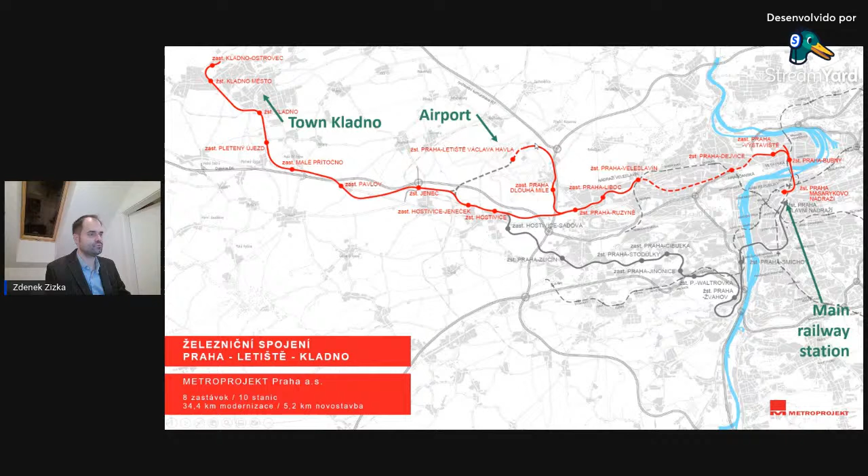About the entire project, this presentation is called the selection of the route for the railway tunnel in the center of Prague. This tunnel is part of a larger urban railway network connecting the center of Prague with the airport and the nearby town of Kladno, which is basically a suburb of Prague, because a lot of people travel every day from this city to work in Prague. A new railway connection will be established, with a stop also at the airport. Here are some impressions of the project before I get to the tunneling details.

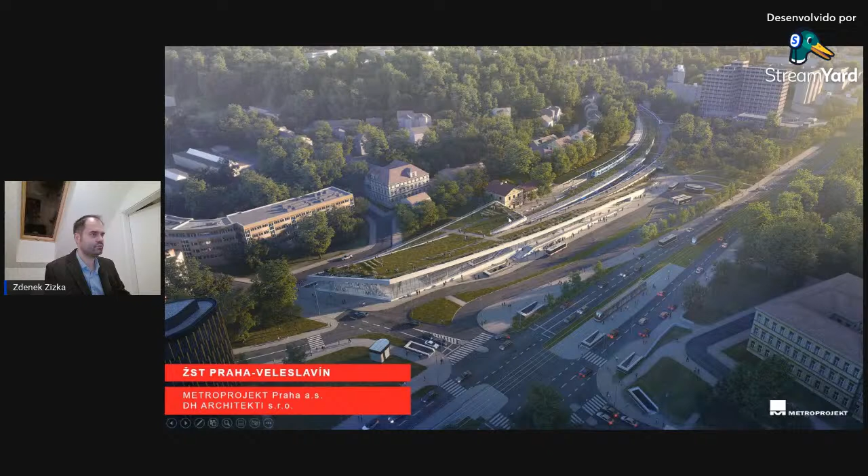One railway station in Prague as part of this project. Another station here, partially underground, partially above ground. Here's the same station from inside, and here some impressions of the upgrade of the railway station in Kladno. The last station will be at the airport in Prague.

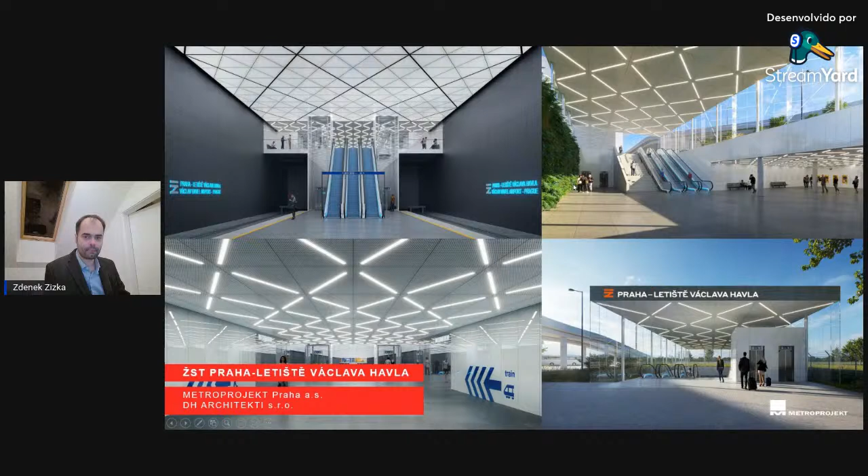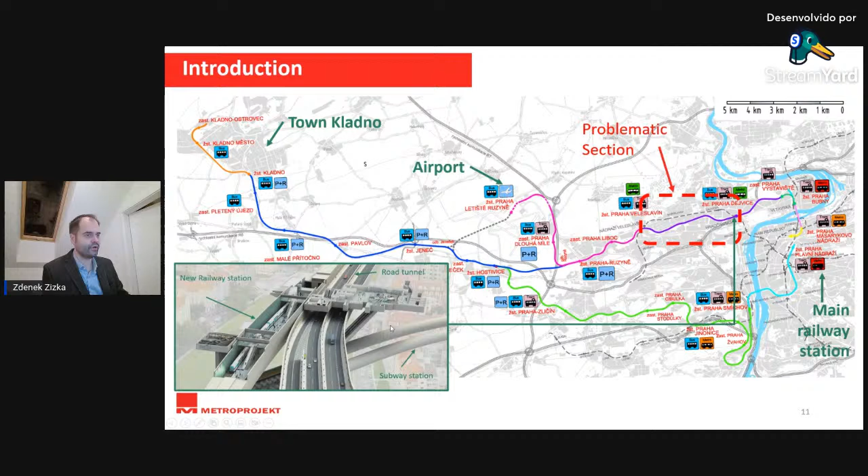So I'm getting back to the tunneling stuff. Here I will focus on this problematic section, which is supposed to be entirely in tunnel, and there are some interesting interfaces. For instance, at the start of this section, you have an interface between this new rail tunnel, which is the subject of this presentation, which has to be constructed just next to the existing road tunnel, and under it there is a located subway station. So it's a very dense area, and everything has to be interconnected. So I'm coming now to the development of the route variants.

Before talking about it, I want to provide some excursus into the design stages in Czech Republic. How is it defined by the construction law?

First, you have to do the feasibility study, including technical economic assessment, and then you go for the preliminary design stage. When you submit this preliminary design to the authorities, you ask for the issuing of the so-called zoning decision. At this stage, only one variant of the project is possible.

After that comes detailed design, and this is then followed, if successful, by the issuance of the building permit. After that, tender design is provided, and this is the basis for awarding the construction work, because as is typical in Czech Republic, the contract type is design-bid-build. There are some design and build contracts, but I think there is just one.

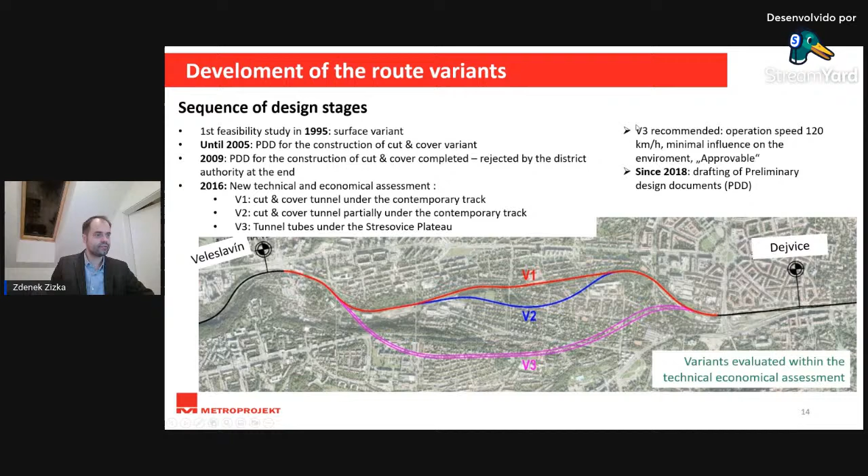So this variant was preferred, and since 2018 there has been drafting of preliminary design documents. During 2019 we designed this variant.

We had a negative statement from the Institute of Physics because they were afraid that if the tunnel is constructed and especially operated under the Institute, it will destroy the possibility of the institute to conduct precise physical experiments due to vibrations and background noise caused by the tunnel.

So there was a slightly different variant, the so-called North New, which was shifted a little bit towards the north. But there was another problem: in this area, at the start, you go very close to private properties, and this was considered quite a high risk for this tunnel variant.

So it was decided to find a new variant, the so-called South, which uses the Střešovice plateau as much as possible and tries to get as much cover as possible.

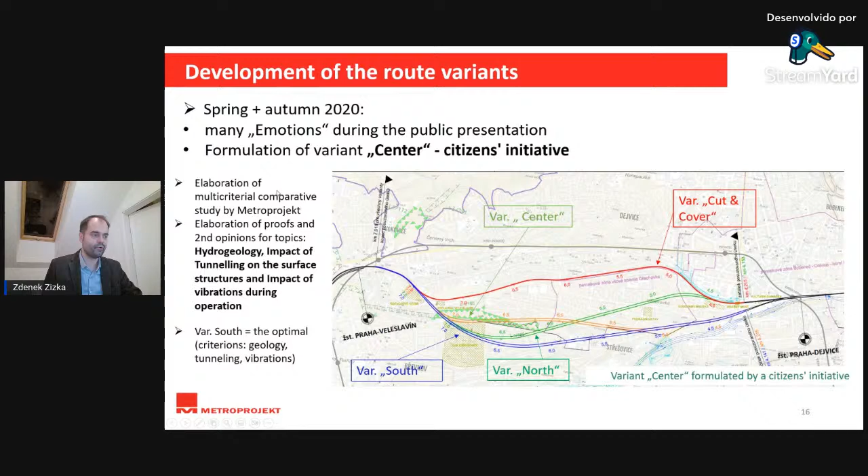It turned out, as we expected and as our multi-criteria evaluation delivered, that variant South is the best in all aspects. So we followed this variant.

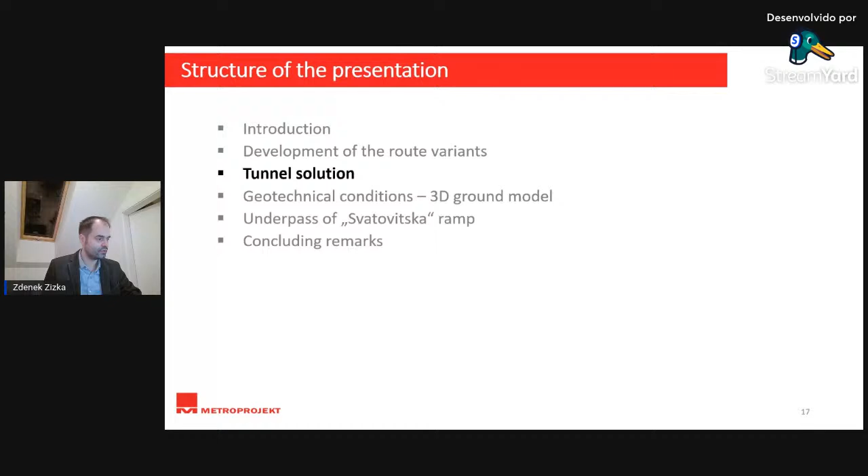Now I'm going to say something about the tunnel in detail. It is planned to be 2 single-track tubes excavated by TBM under a populated area. On the right side you can see the longitudinal section of the track. Now I will show you a video.

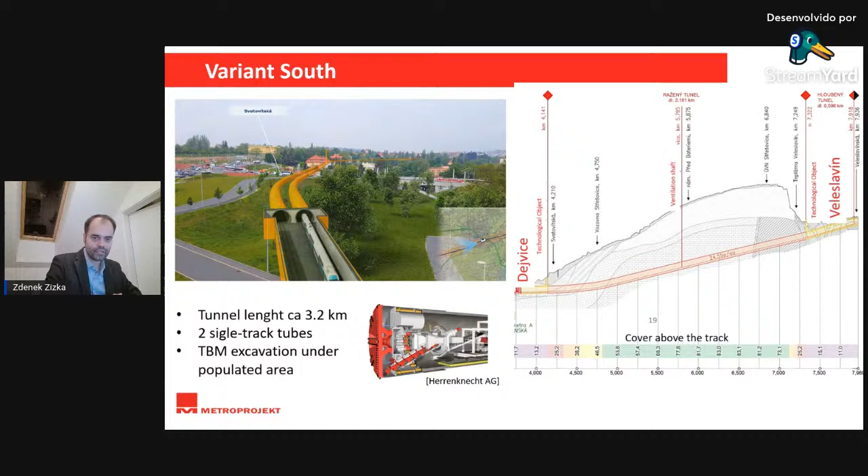I hope it's working, showing how the tunnel will pass under the Střešovice plateau. At the start the cover is about 30 meters and increases very fast. When it arrives at some populated area, the cover above the tunnel is at least 45 meters. When it passes under the church, it has 60 meters of quite competent rock above.

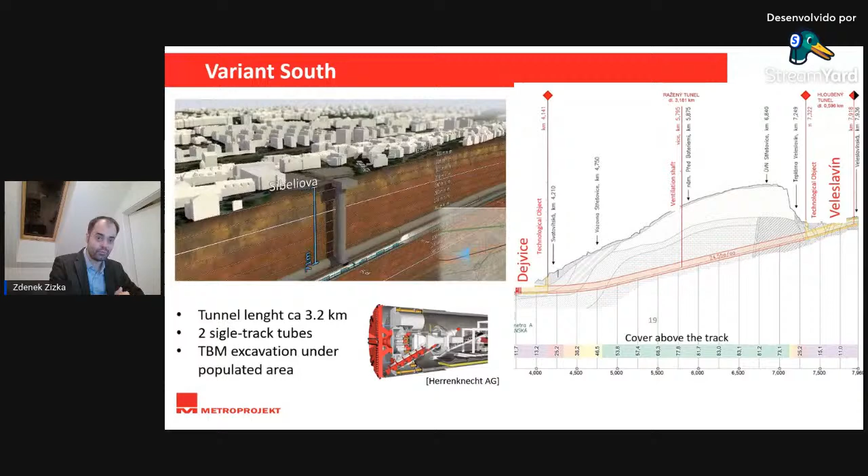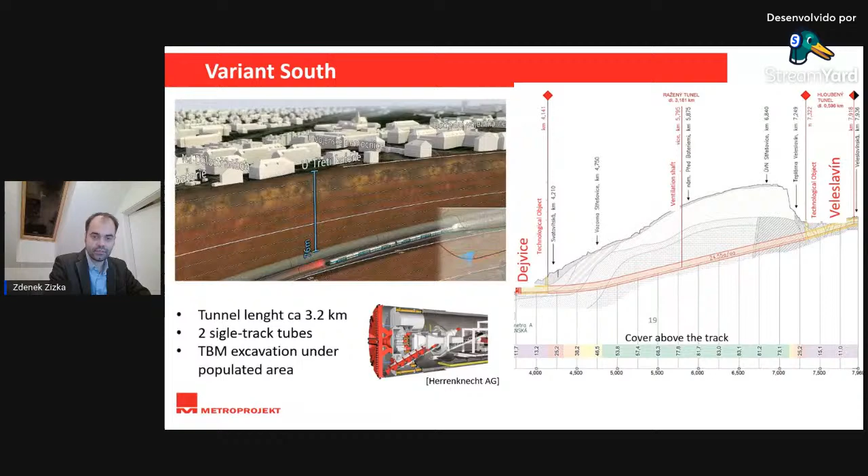At the end of the tunnel, the cover is about 70 meters, and now we are at the deepest point under the Střešovice plateau. At the end of the stretch, the cover decreases again, and we arrive at the tunnel portal, which is then followed by another cut and cover tunnel.

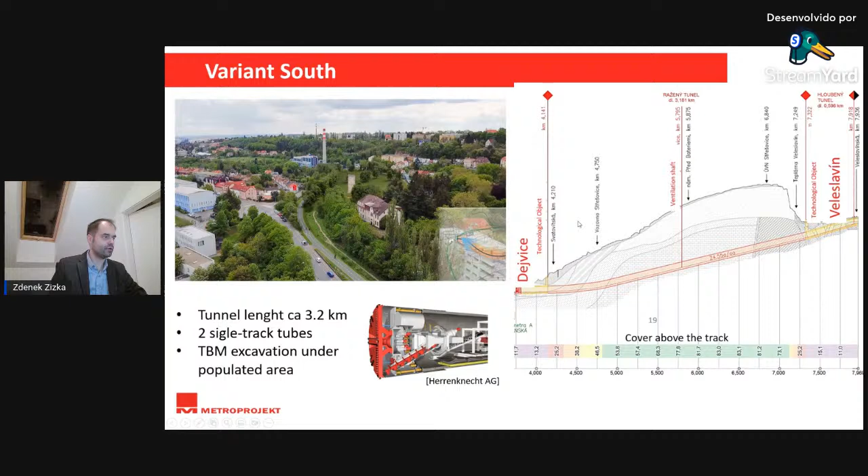So here's the alignment of the tunnel. Some interesting features along the alignment. The first complicated section is that you have to underpass with these TBM tunnels the so-called access ramp to a road tunnel, which is located here, in cut and cover.

Then you have to pass around tunnel Blanka, which is a road tunnel here. On this place you can see the failure of the tunnel, which happened during the construction of this road tunnel. So this is what we all would like to avoid.

Then we are passing close to the Institute for Physics, but the distance is more than 100 meters, so that should be fine for the physicists. We are passing under the church, here we've covered 60 meters, so that should also be fine for the church by limiting the surface deformation on the axis, under the allowable limits.

Due to the fact that at the starting tunnel portal of this TBM tunnel there is a cut and cover station, and on the other end there is also part of cut and cover stations, we have to have in this tunnel a ventilation shaft for emergency purposes. This tunnel is 3 kilometers long, so usually it wouldn't be a problem for safety, but in this case we needed to introduce it.

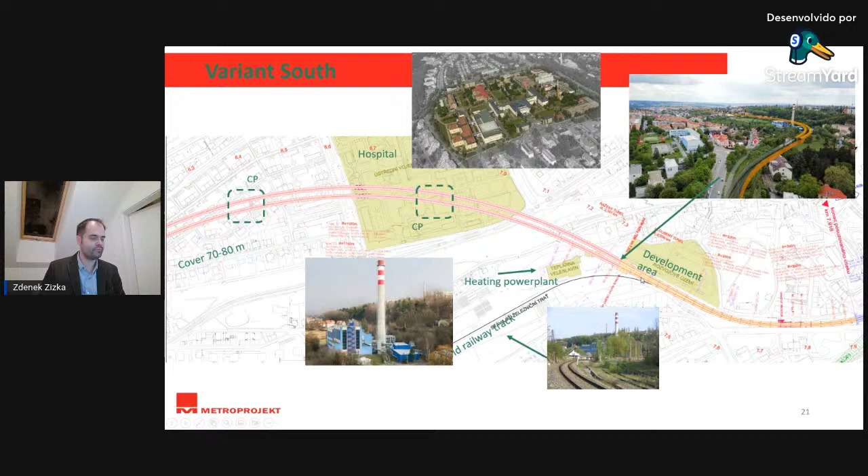So here is the second part of the alignment. Here it's necessary to pass under the hospital, but the cover here is above more than 70 meters. And then at the end, when you're arriving at the portal area, you pass around the heating power plant.

So something about the tunnel cross section. There will be excavation diameter expected 9.9 meters, internal diameter 8.7 meters, segment lining thickness 45 centimeters with EPDM gaskets. And in this current stage of the design it's not decided whether it's going to be reinforced concrete or steel fiber concrete. This is going to be defined in the next design stages.

What is interesting, we have a railway tolerance, which is necessary according to the Czech norms for railways, which is 30 centimeters. And what is possible is to include in this 30 centimeters also the driving tolerance for the TBM, which is saving some centimeters of the cross section.

And what is also interesting, or good to mention, is that there is going to be slab track in the tunnel.

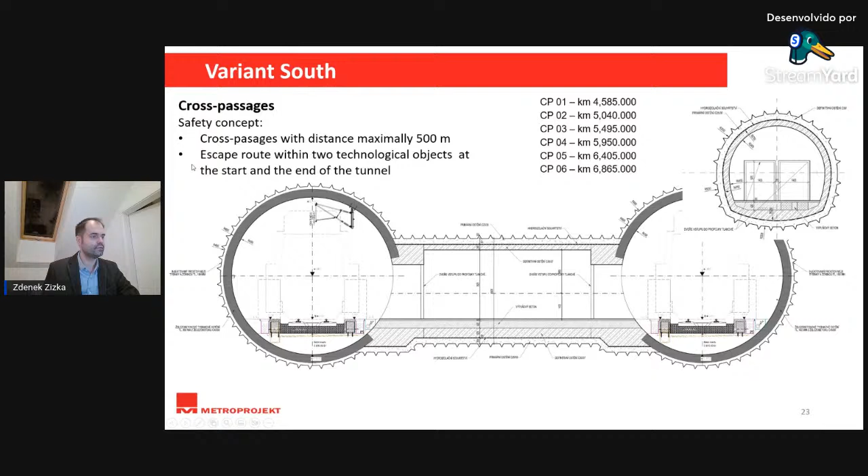So here are the cross passages every 500 meters, based on the European law, nothing special. And there will be not only the cross passages, but at the start and at the end of the tunnel there are 2 technological objects, and they can be used also as escape routes.

Here's again the ventilation shaft. It's going to be about 60 meters deep, with the internal diameter about 8 meters, and it's going to be used only for emergency ventilation. It's not going to be possible to use as an escape route. For escape, there should be used only the cross passages or the escape routes at the portals of the tunnel.

This is designed with steel fibers for the primary lining, and maybe for the secondary, but the owner has still to decide if it's going to be allowed also for the secondary lining or not. For structural design purposes, at this early stage, we considered the lining as unreinforced, not considering any benefit of the steel fibers yet.

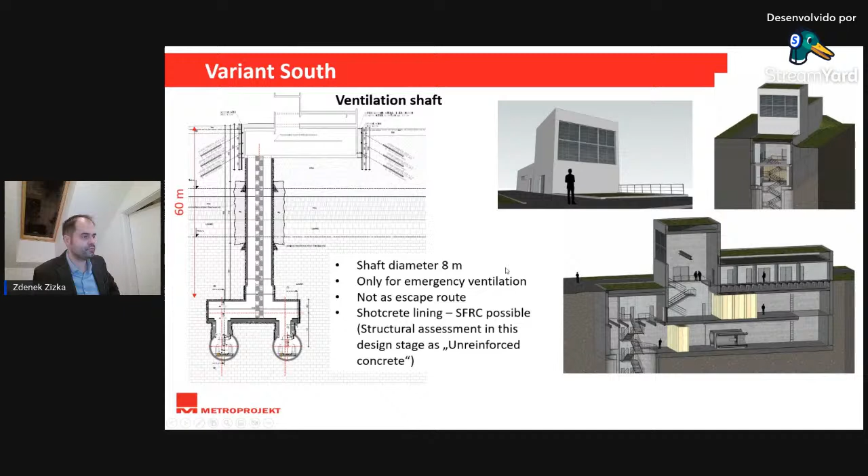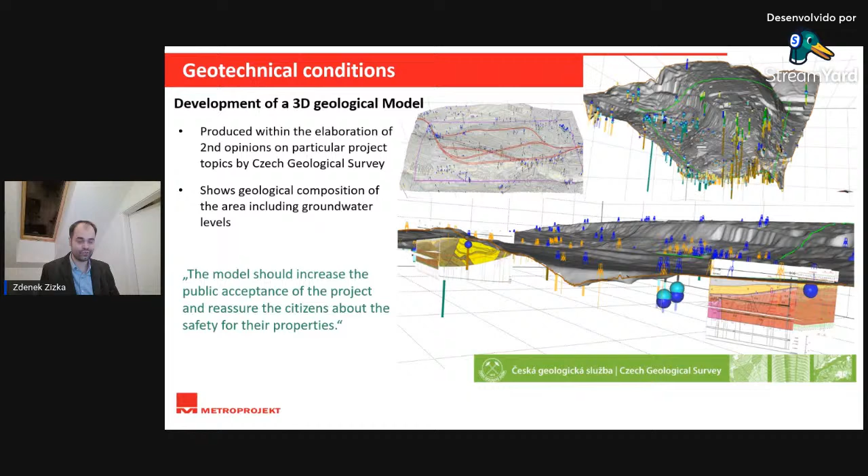Here is shown the 3D geological model which we have prepared for this project. As we thought, the intention of this 3D model at this very early stage of design is that the model should increase public acceptance of the project and reassure citizens about the safety of their properties. So the point was to show the public that we are sure what we should expect underground, or at least as sure as possible, and that we know what we are doing.

Here are some details about the model. It's based on the Czech coordinate system, which is quite specific, and it combines all new and old bore log data. What's important is that this model can be developed further in later design stages of the project.

So we started with this quite simple model, although there was a lot of bore data included, and you can extend this model in every next stage.

From this 3D model, you can extract 2D cross sections directly, and the model also enables automatic calculation of excavation volumes in various types of rocks. This model can be seen on the website, so if you're interested, check it out, and you can go through the area in 3D and see the expected rock conditions.

I'd also like to mention that this model was established in cooperation with the Czech Geological Survey, which put all the information together and established the model.

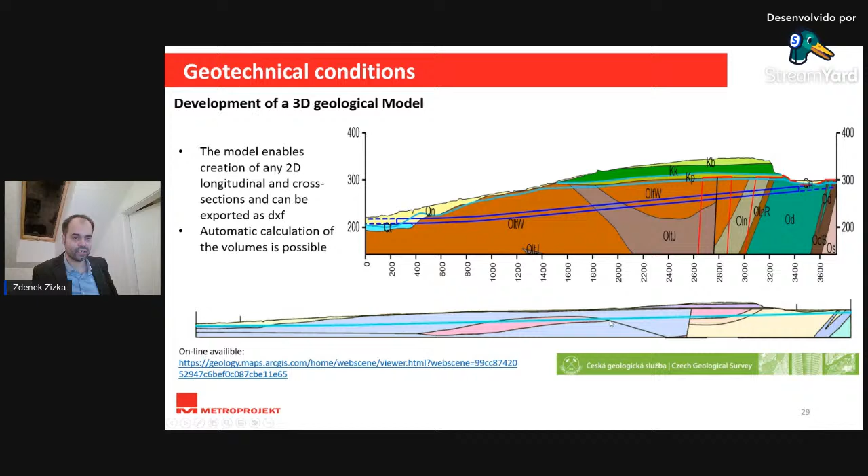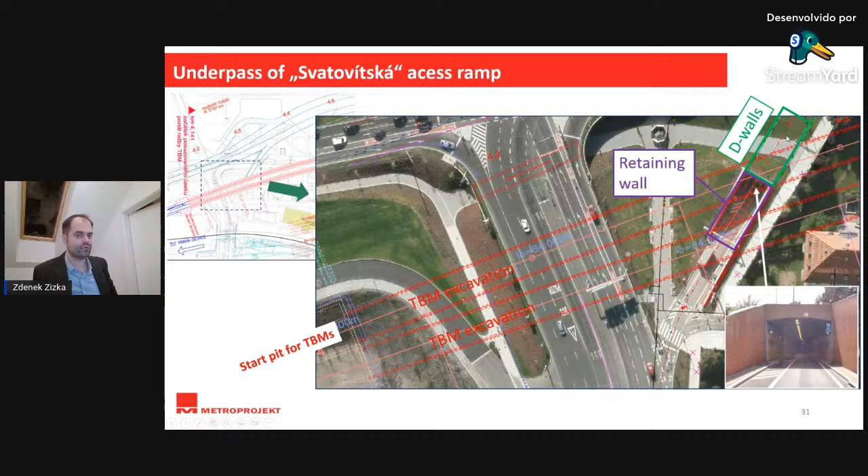So here is the cross section in this area. Here you can see the lamellas of the D-walls, and here is the retaining wall. The alignment of the TBM tunnels is planned so that we come up to within 2.1 meters of the bottoms of the lamellas.

What is the problem with these diaphragm walls? At the top of the lamellas there is a concrete slab, and this slab is loaded by the soil cover, which results in high point loads under the tips of the D-walls.

So in case we would drive here with TBMs using active face support, there will definitely be deformation of these structures.

Here's the cross section of this D-wall tunnel. As I said, here's the top slab, the D-walls, and the bottom slab.

Here is the cross section of the retaining wall, which is quite simple—just the angular retaining wall on both sides, nothing special, with road construction inside.

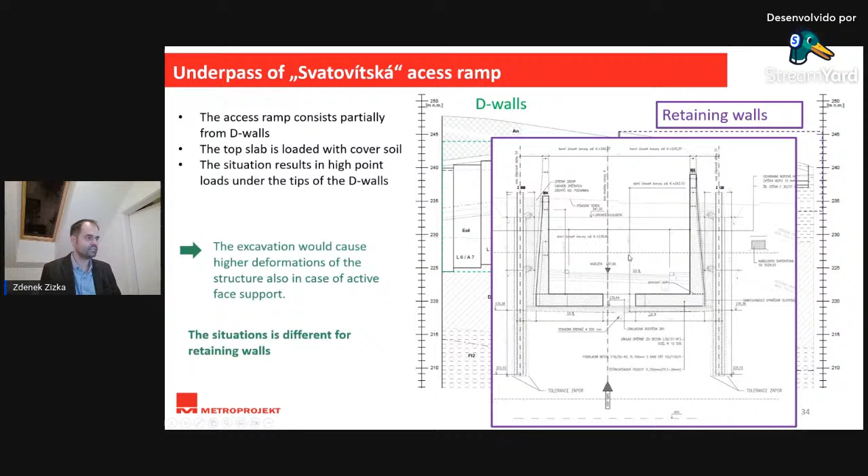So within the cross section, you have two different situations for both tunnels, here and here.

Going back to the layout, we decided to sink a shaft here before the crossing of the ramp, and make so-called pipe roofing for the left tube, and horizontal micropiles for the right tube.

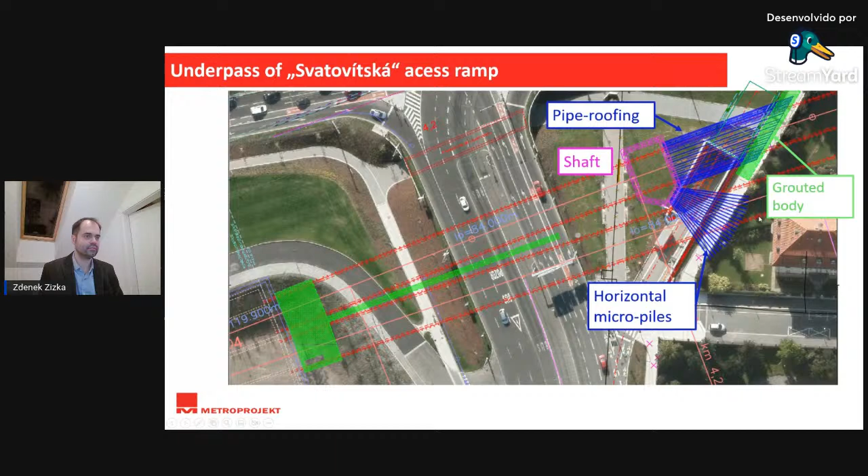So here it is in the cross sections. On the left tube, you can see the pipe roofing made of steel tubes with a diameter of approximately 1.3 meters. And here on the other side, you can see the horizontal micropiles.

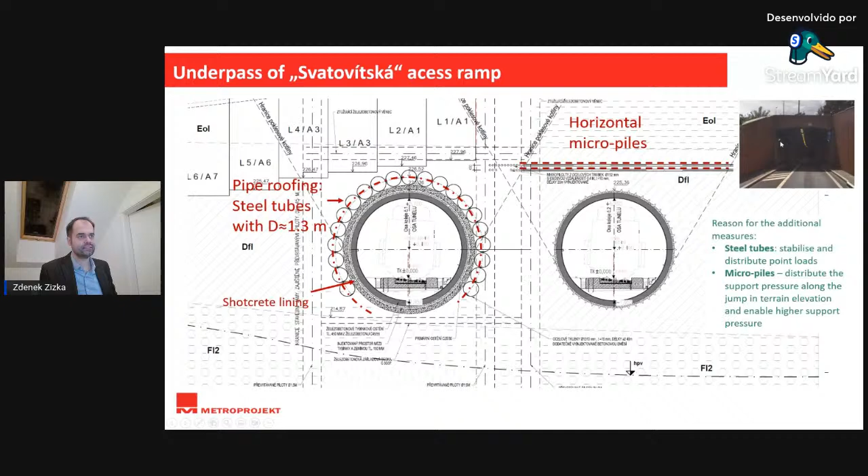There are different reasons for using these two additional measures. The steel tubes on the left side are used to stabilize and distribute point loads from the D-walls, and the micropiles on the right side are used to distribute the support pressure along the jump in the terrain and enable higher support pressure when the TBM passes under the retaining walls on the right side.

So here's a summary of the sequence of measures: excavation of the construction shaft, execution of the grout body, installation of micropiles and steel tubes. Then there will be shotcrete excavation under the steel tubes, which is subsequently filled with poor concrete. The TBM will pass on the left within the open mode inside this concrete body, and on the right side, the TBM will pass in closed mode.

But the question is how the pipe roofing could be installed in these very dense conditions, where you have a pit only on one side, and on the other side it's not possible to place any construction pit. Other boundary conditions include tight tolerances, the presence of soft ground where hard rock is also possible, and possible concrete rests under the D-wall tips.

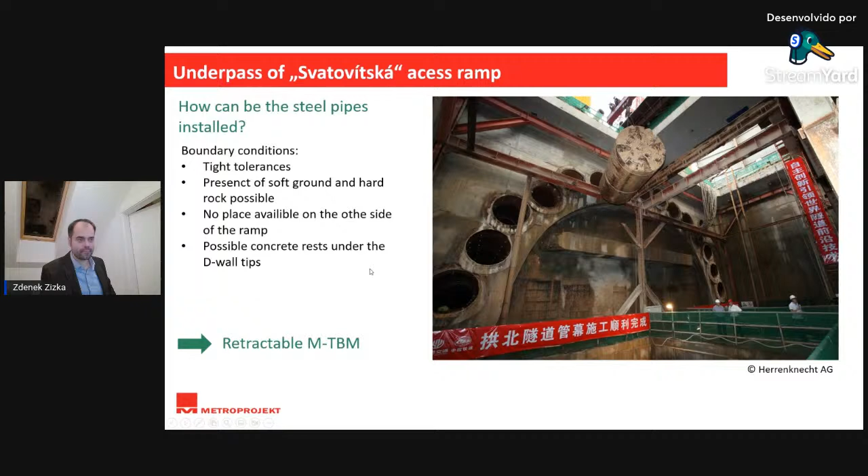What is the retractable M-TBM? It's a micro TBM which, after boring, can be pulled back again to the launching pit. There are two principles: one is that the outer ring of the cutting wheel is left in the ground with the shield, and the other is that the cutting wheel decreases in diameter and is then put back.

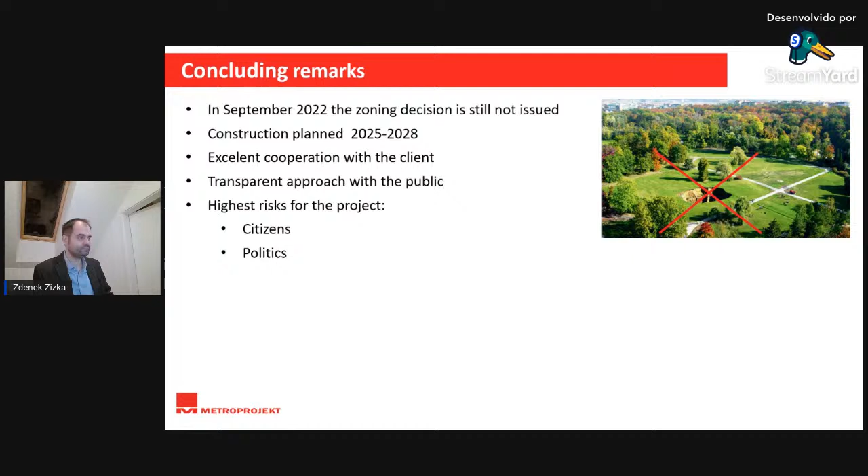Concluding remarks of my first presentation: in September 2022, the zoning decision is still not issued. Construction is planned for 2025 till 2028. There is very good cooperation with the client. We try to be as transparent as possible with the public, to talk about the risks and the benefits of the project, and we emphasize that we are doing everything to decrease the risks for the public as much as possible. But there is also the risk that politics will decide to stop the project, or that citizens will be so much against it that it won't happen that we go from the airport to the city center by train. So that was the first presentation.

I'm not sure, Daniela, if we should wait for some questions now, or should I continue with the next presentation?

I guess you can continue with the next one, and then we'll all check.

Right. Unless somebody wants to, if somebody has any question now, please send it in the chat. So far we haven't had any questions, so I would say just continue.

So here's my second presentation. It's going to deal with the new metro line in Prague, which is now already partially constructed. Another tender for construction is running now, and the third part of this new line is still under design.

This presentation is divided into three parts. First, there will be some basic overview. In the second part, it will focus on mined stations on this line, and part three will focus on TBM excavations.

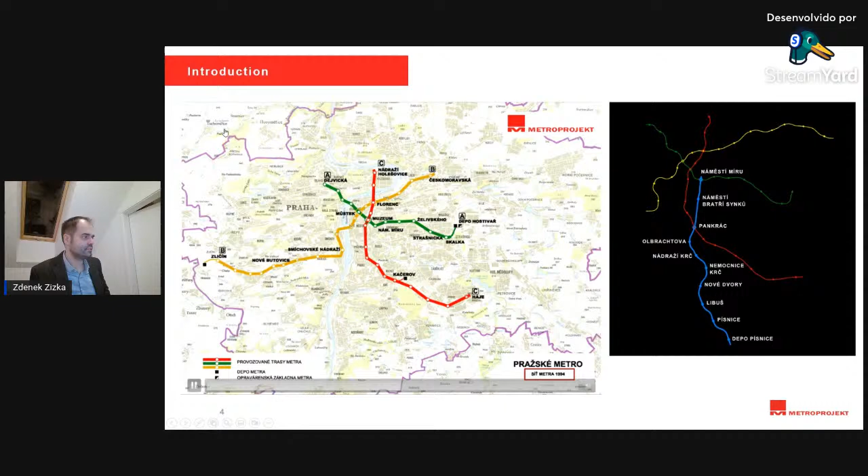So the basic overview: here on the left you can see the development of the network in Prague, with the years showing how it progressed. First it started with line C, then it continued with line A, and the third one was line B. Here you can see year by year how the network was increasing.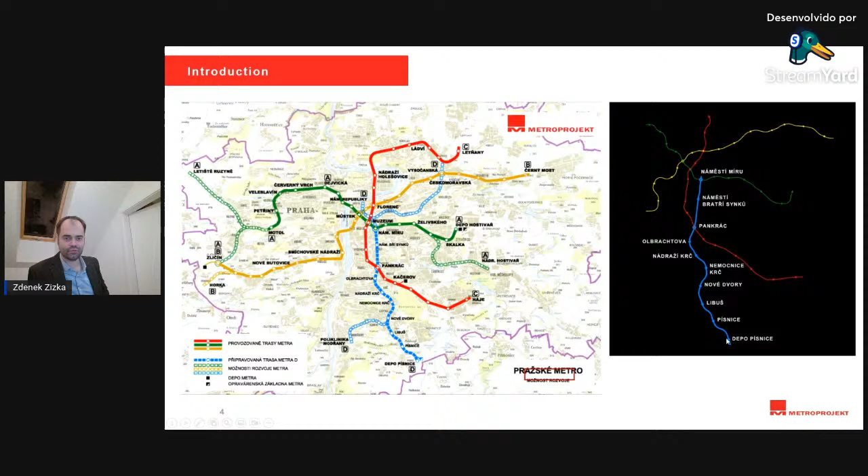So here we are now at this stage, talking about this line, the blue line, called line D, which is going to start at Náměstí Míru station in the city center and end in the south of the city at the so-called Depot Písnice. So let's get the work done and make the design - that was the statement. There are going to be 10 stations to design and one depot.

I will now go through the entire line and talk about the different stretches and what is going on now in these stretches. The first stretch is between Olbrachtova and Pankrác. This contract was already awarded to Subterra, Hochtief, Strabag, and Züblin, and construction works have already started.

The second stretch between Nádraží Krč and Depot Písnice is now under ongoing tender. Under these colors you can see the different excavation methods which are going to be employed during construction.

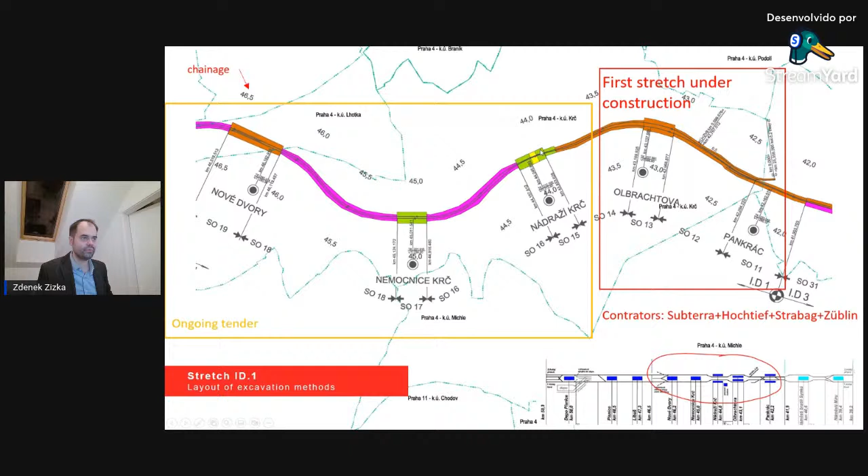It is better to see on this longitudinal section between the station Nové Dvory and station Pankrác. This first contract, already awarded, is everything conventional - you can see the conventional excavation of the stations, followed by a cut and cover station, and then the rest is going to be done by TBM. There will be only one mined conventional station and one cut and cover station.

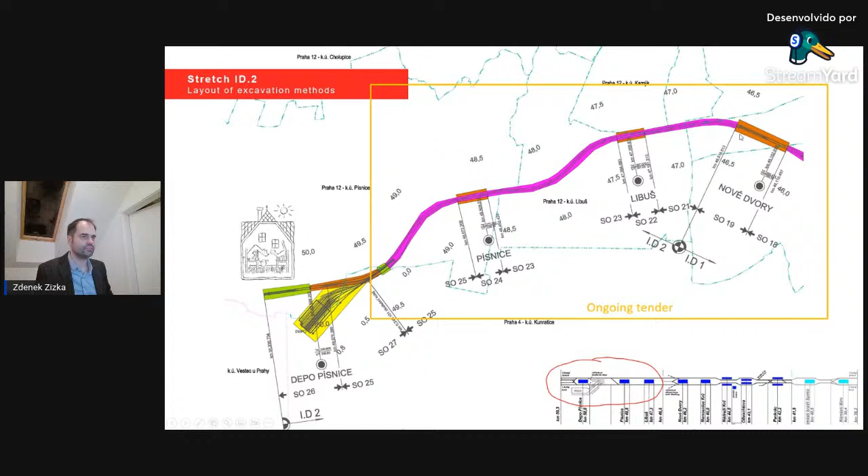It's possible to see again in the layout the rest of the stations - here again, mined station Nové Dvory, and the rest cut and cover. Moving to the other side, here is again the longitudinal section: Nové Dvory station mined, running tunnels between the stations all by TBM, and the stations, where they are close to the surface, are going to be cut and cover.

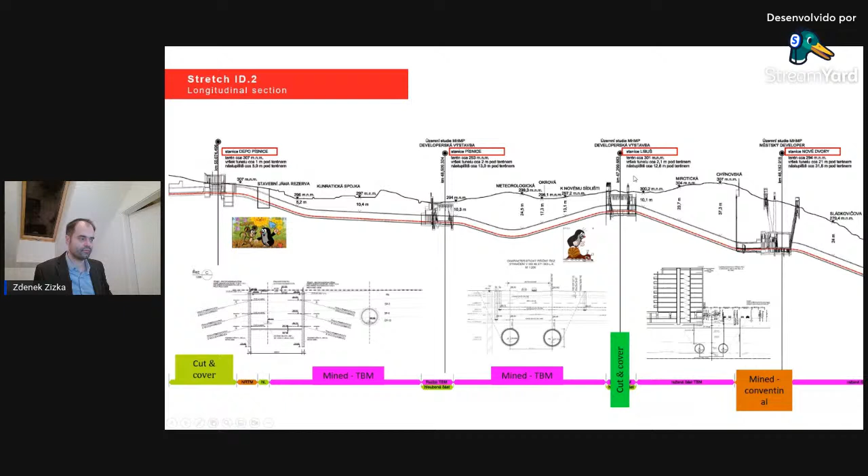Here is the third part of the D line between Pankrác and Náměstí Míru. There is going to be excavation, probably conventional, plus one cut and cover station and another conventionally excavated station.

Here's the cross section. As you can see in Prague, there are quite different elevations to run through. You start with one station at elevation 260 meters, then pass a valley about 70 meters lower, then another hill, almost back to the same elevation as at the start. This results in the typical layout of the Prague metro: deep stations under the hills, and shallow stations in the valleys to let the trains pass through this longitudinal slope.

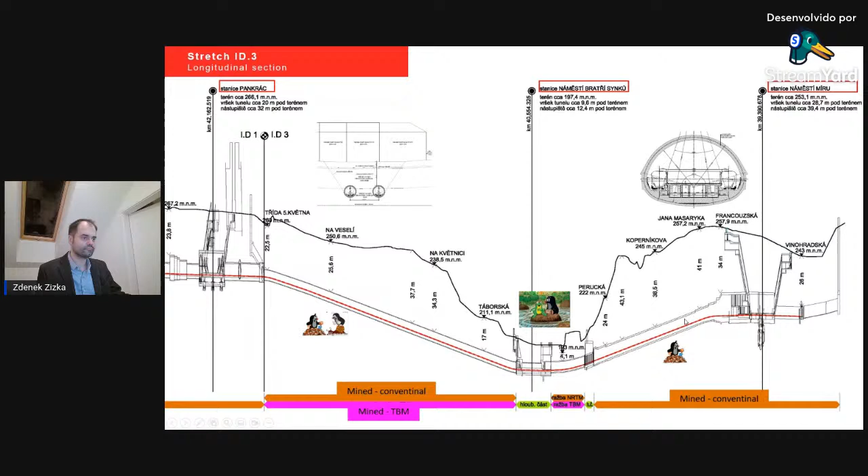Here is the summary of the excavations. There will be two times about 6.2 kilometers of TBM excavation. Conventional excavation is planned for about 5.6 kilometers, and cut and cover for about 1.8 kilometers.

Here are some impressions of the stations. The entire line will be operated driverless, so you can see platform screen doors, and the typical color for this line will be blue.

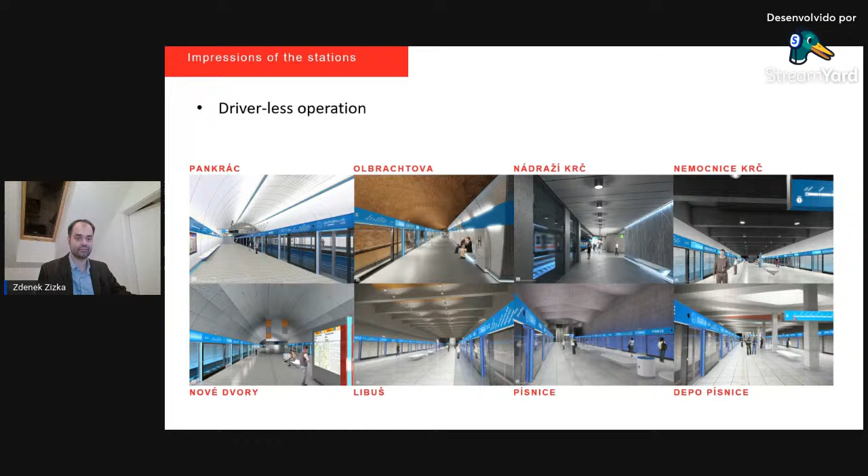Now I will focus on the main stations. There are several main stations. The first is Náměstí Míru, which will have a junction to metro line A, and the station is designed as single-vault.

The next station is Náměstí Bratří Synků. The final variant is not yet decided, so I will not talk about that.

Here's the station Pankrác. This station is already under construction. It will be a single-vault station, and a junction to metro line C will be constructed there.

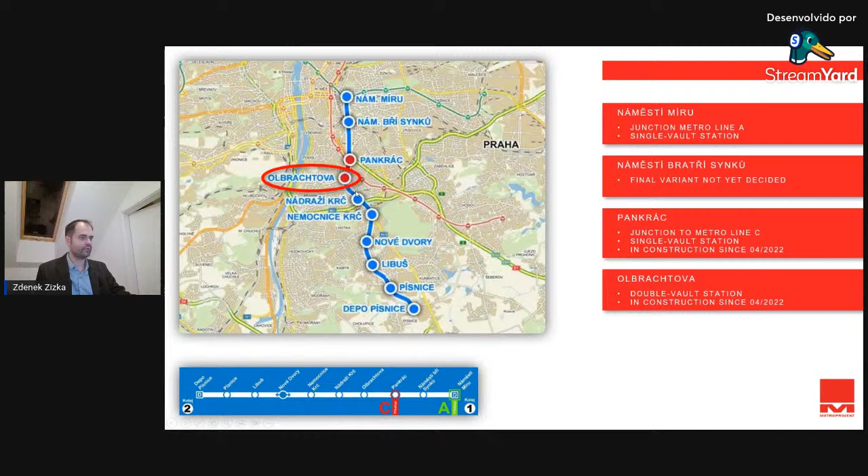The next station, also already under construction, is called Olbrachtova. It will be a double-vault station, and as I said, construction has already started.

The next big main station is Nové Dvory. It will be a single-vault station, and it's necessary to establish there also the possibility to make an appendix to the D line toward the Modřany area, a district of Prague south, close to the river. So these are all the main stations.

So let's start with the station Nové Dvory. It will be a single-vault main station with island-type platforms, a cover of about 33 meters, two surface entrances, and a barrier-free elevator. It will also be an important interchange point to suburban buses.

There will also be a parking slot for cars.

There is a question from the audience about which type of waterproofing there will be. There will be conventional waterproofing, just the membrane.

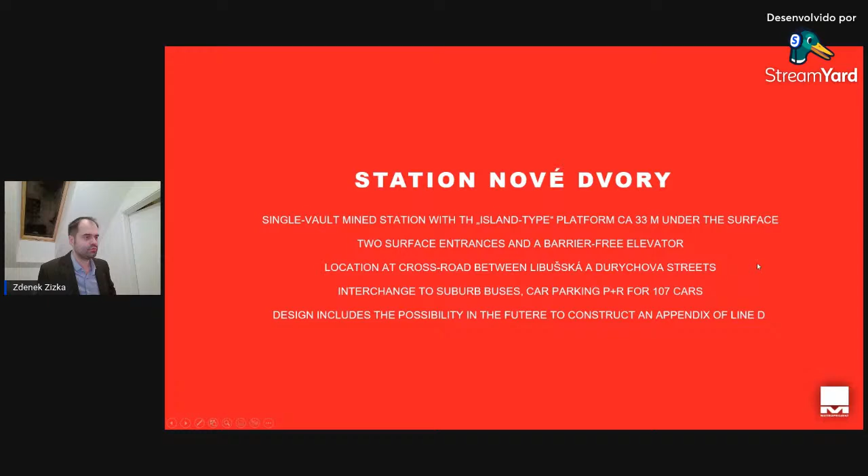The design includes the possibility in the future to construct an appendix of line D.

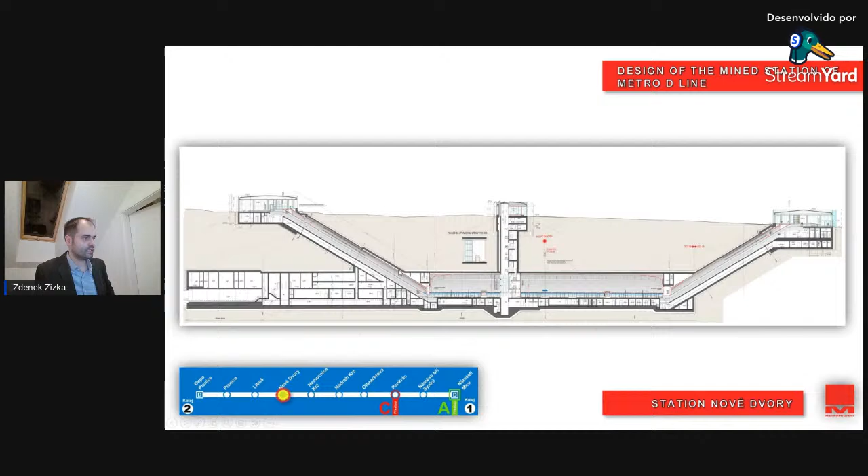And here is the longitudinal section of the station. You can see the area for the public with the platforms, and here's some of the technological background of the station.

Here it's possible to see the cross section of the station, with some impressions of its size. The cross section area is going to be 290 square meters.

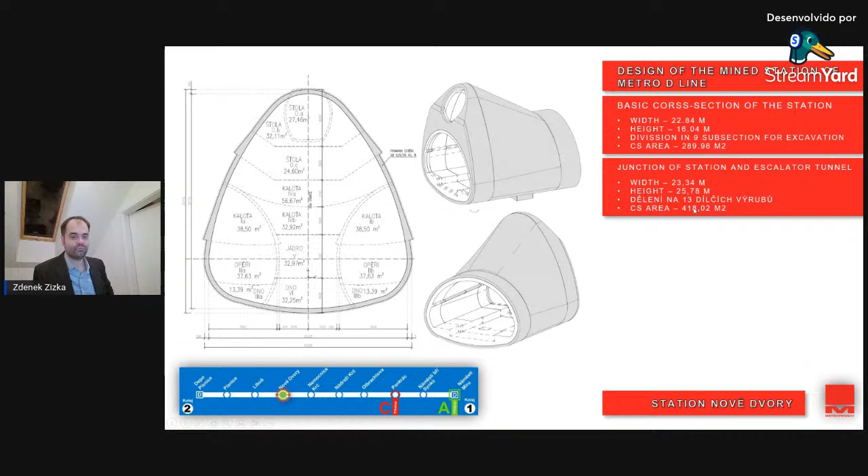Then the cross section with the escalator tunnel has an area of more than 400 square meters. And the maximum cross section shown here is more than 420 square meters.

It's going to be excavated conventionally, with sprayed concrete as the first layer and cast-in-situ concrete as the second, permanent lining layer. There will be a conventional waterproof membrane between these two concrete layers, so nothing too new. This system was already very successfully used on other stations in Prague, so the owner decided to keep the system and not make any new experiments.

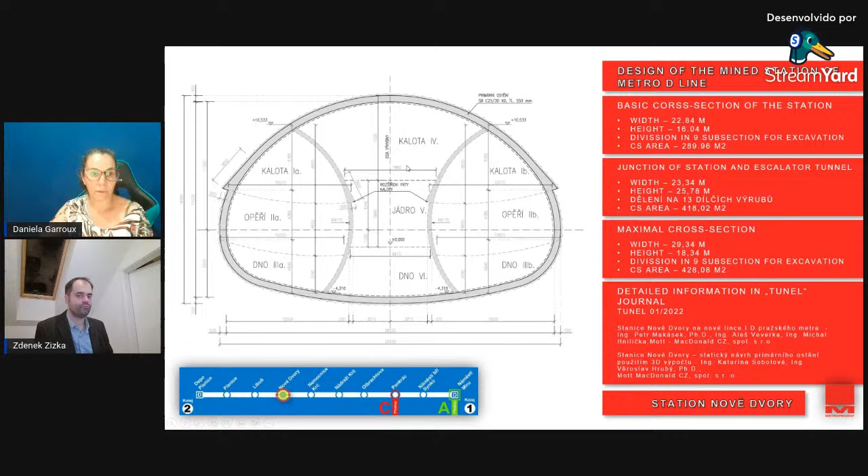There is again a question from the public: will the TBMs pass through the station, or will it be built prior to the station construction? For this case, I think we have some questions, but I don't know if you wanted to go through the entire presentation first and then show the questions.

Yeah, I can discuss it now, because I can use this cross section to show it. In this design, there is a plan so that the TBMs can pass, and this station will be constructed prior to the TBM's arrival.

Yeah, so Werner is asking something related to that. He has two questions. I don't know if you already answered, but what type of waterproofing is it?

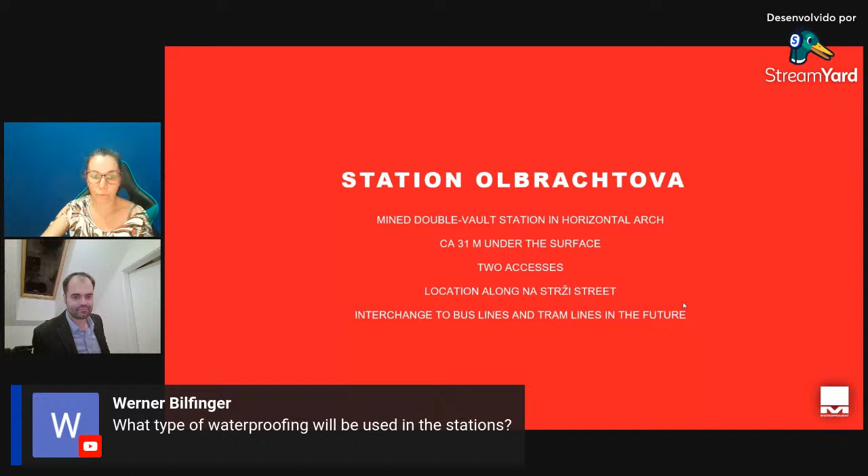I already discussed that several slides before. The question was about what type of waterproofing will be used in the stations, and whether the TBM will pass through the stations or prior to station construction.

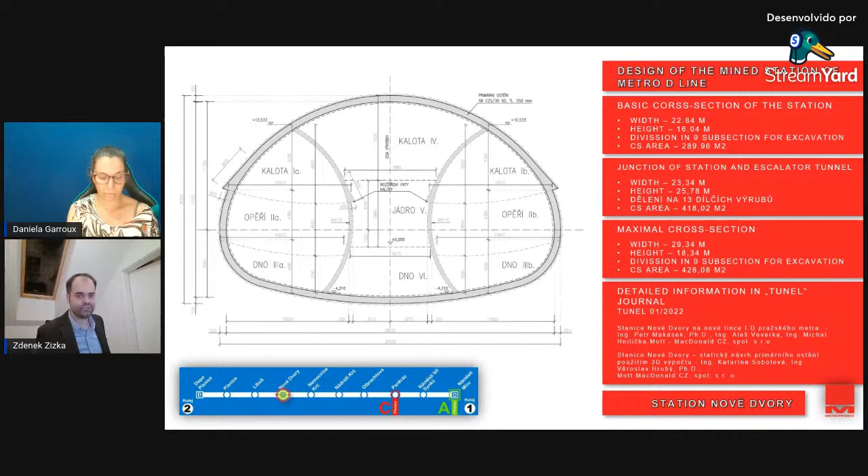For this station, the station will be constructed first, and the TBM will pass when all the primary shotcrete lining is already installed. The secondary lining will not yet be installed, only the primary lining.

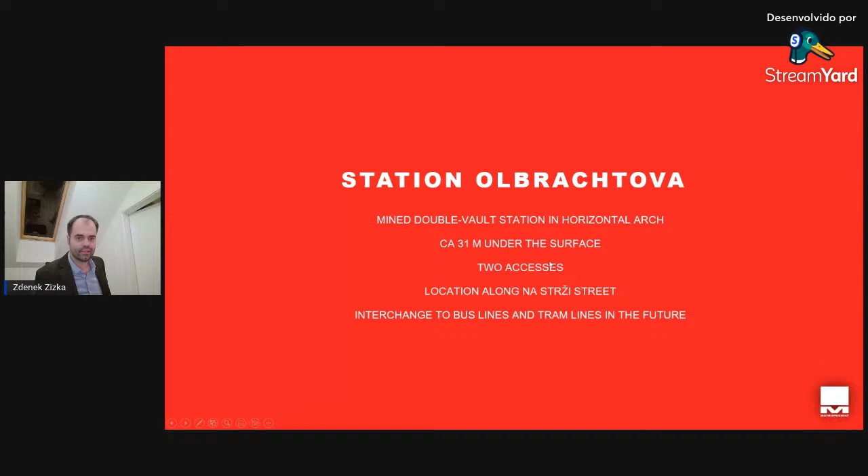So let's go to the next station. Olbrachtova is a double vault station, about 30 meters under the surface, with 2 accesses, and an interchange to the bus lines and tram lines.

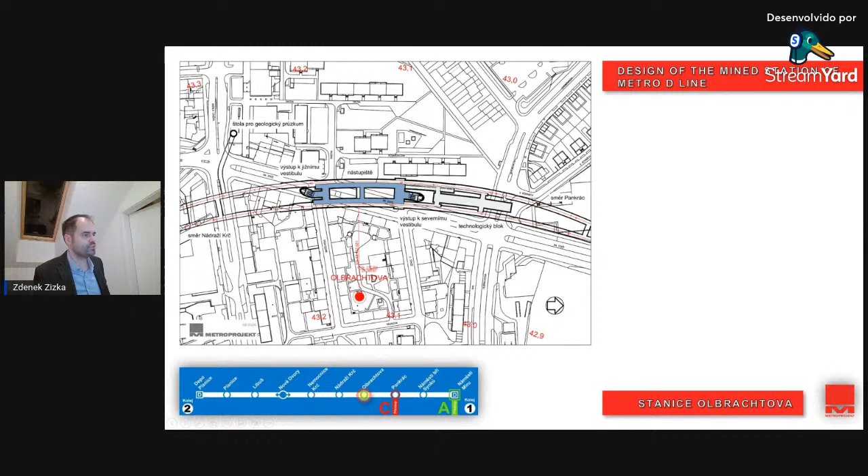On the surface, there will be 2 accesses to the station. Under the surface, the layout of the station has 2 accesses, with the public area and the technological background. Here is the longitudinal section of the station, which is everything mined.

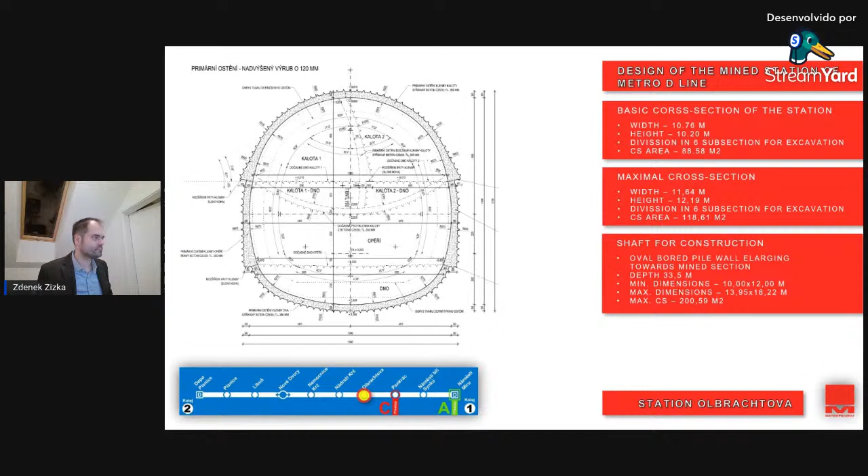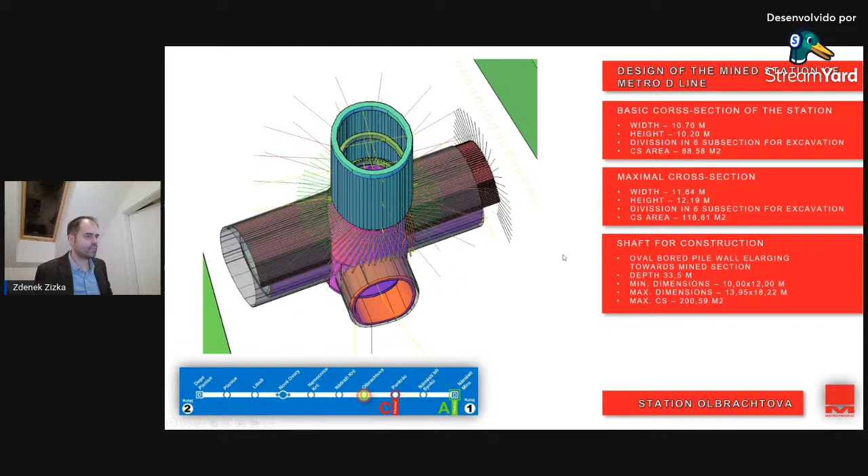The geotechnical conditions are characterized by shale. Here are the cross sections - as you can see, this is the double vault station, so the cross sections are much smaller. And here you can see the shaft which is used for the construction of the station.

One of the most complicated areas is the station Pankrác, on the blue line, the D line, which is to be constructed under the currently operating Metro C line. This is constructed in cut and cover for the station, and excavated tunnels.

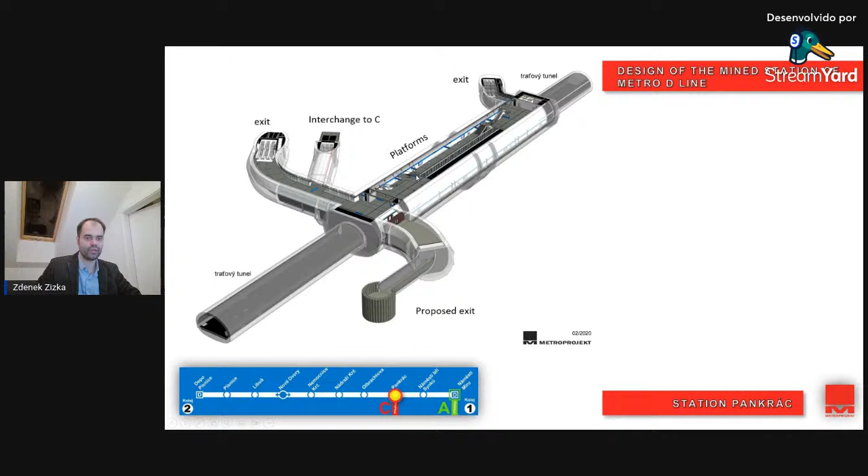Here's the 3D model of the station. It's the single vault station, so it's a very big cross section. Here again is the public area, the line C station, and the technological background, which is very huge on this station.

The surface after the construction, and here again the longitudinal section of the station. Here you can see the cut and cover metro line C. There is about 5 meters between the constructions, and about 10 meters under the high-rise buildings.

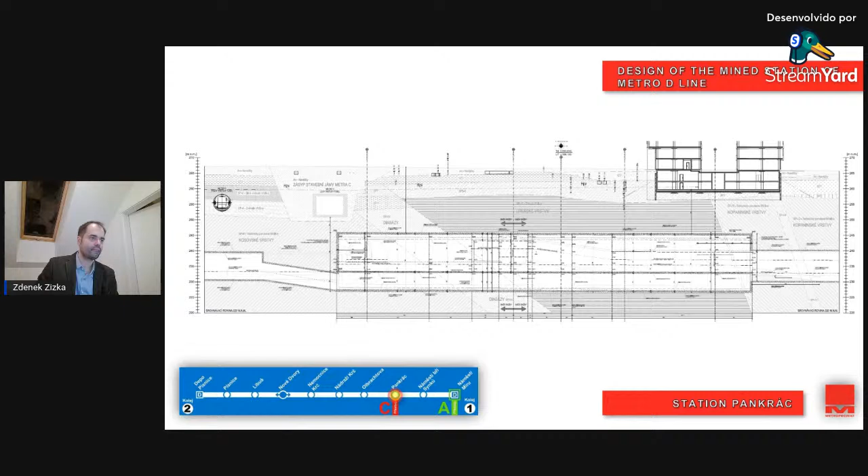Same question about the TBM passage - here on this stretch there will not be a TBM. At this stretch between Pankrác and Olbrachtova, the running tunnels will be excavated conventionally.

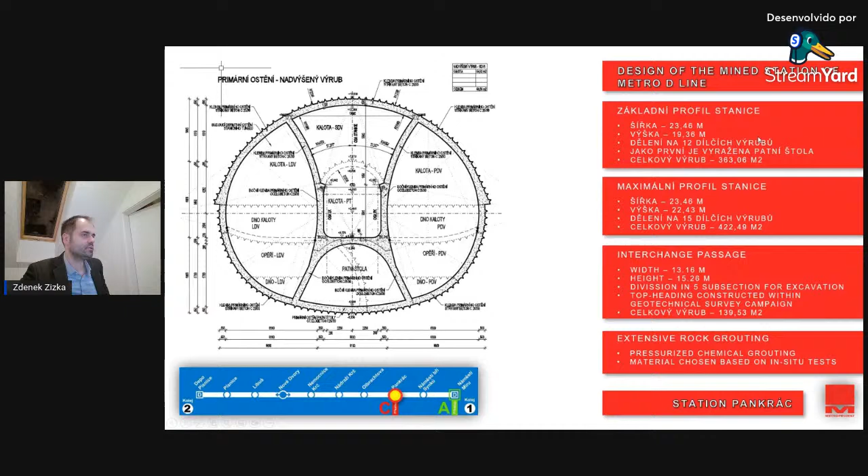Here are some impressions about the cross sections again. The basic cross section is about 23 meters. The maximum cross section is more than 400 square meters, and the interchange passage is about 140 square meters.

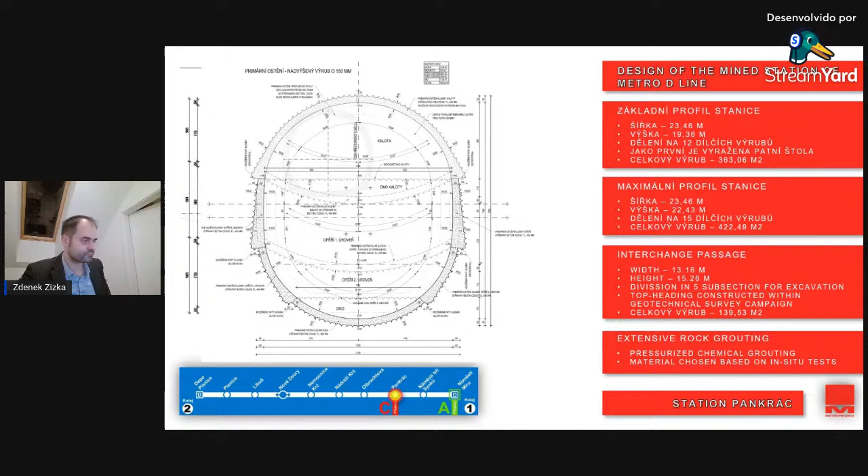The last station is Náměstí Míru. It's again the interchange between line D and the existing line A. What is interesting in this case is that the new station is going to be constructed above the existing line.

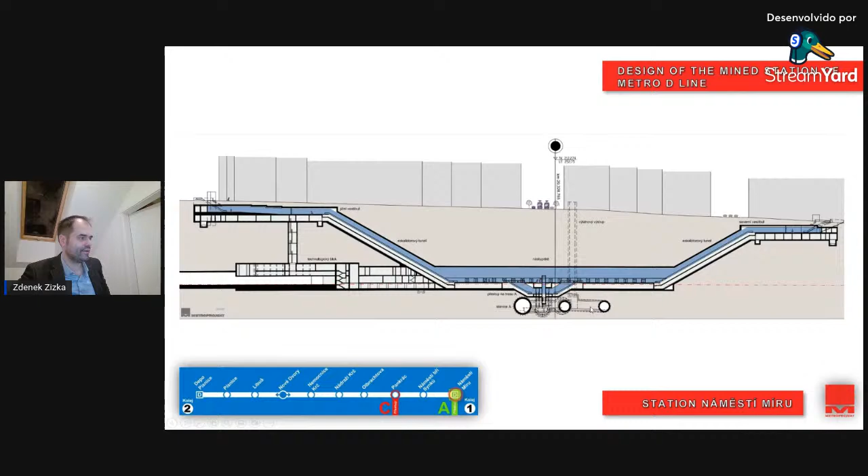So here is the longitudinal section of the station. Here is the original Metro Line A station, and here the huge one, Metro Line D station. Here's the layout of the surface, and the subsurface. There will be a cross between the line A station and the line D.

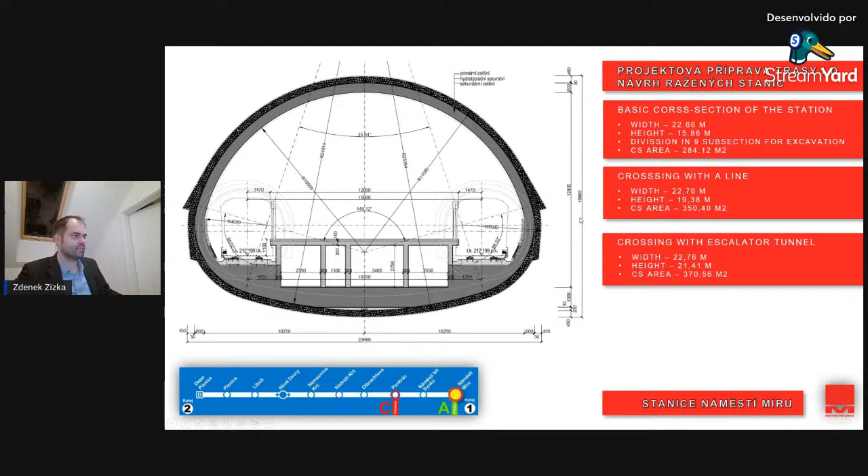Here is the change between the line D and line A stations, and here the cross section - again the single vault station, so it's quite big. Crossing with the A line and crossing with the escalator tunnel.

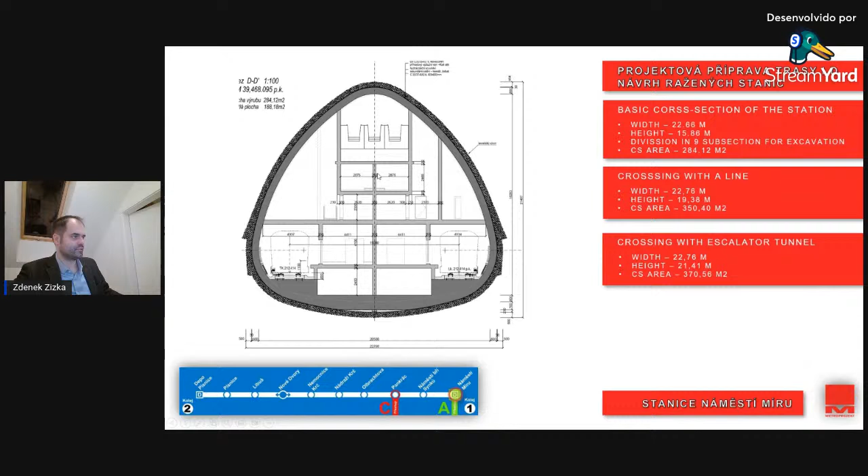So I'm coming to the last part of this presentation. Maybe I will answer the questions. The last question is about the approximate geomechanical properties of the shale. It's not easy to answer - they are quite different, because you have different shale formations in Prague.

It doesn't depend only on the weathering degree, but also on which shale formation it is. For example, Letná shale is a very competent rock, with an elasticity modulus of approximately 100-500 megapascals. Another shale might not be so competent, with an elasticity modulus of only 60 megapascals. So when I say shale is everywhere in Prague, there are a lot of types of shale you can encounter during excavation.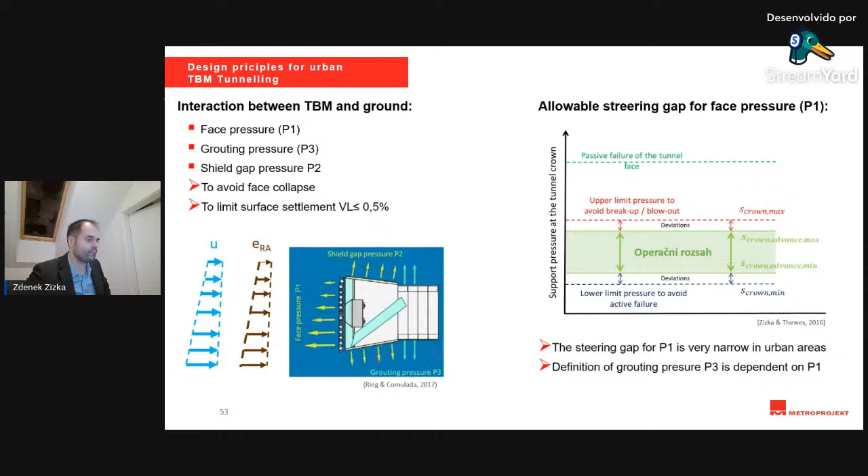And we have a limit for surface settlement. So we are trying to operate or design the operation of the TBM to get the volume loss lower than 0.5%. To do that, we have defined face pressure for the entire excavation stretch to allow these very low settlements to be obtained.

We consider employing widely the observational method during TBM tunneling. So there is some excavation design and some setting for the TBM, coupled with monitoring. Trigger values for operation parameters are going to be defined and verified. What is important, we designed the monitoring layout so that always before passing some critical infrastructure there will be a test field where you can check the setting of your TBM, to see if it's appropriate to obtain low settlements.

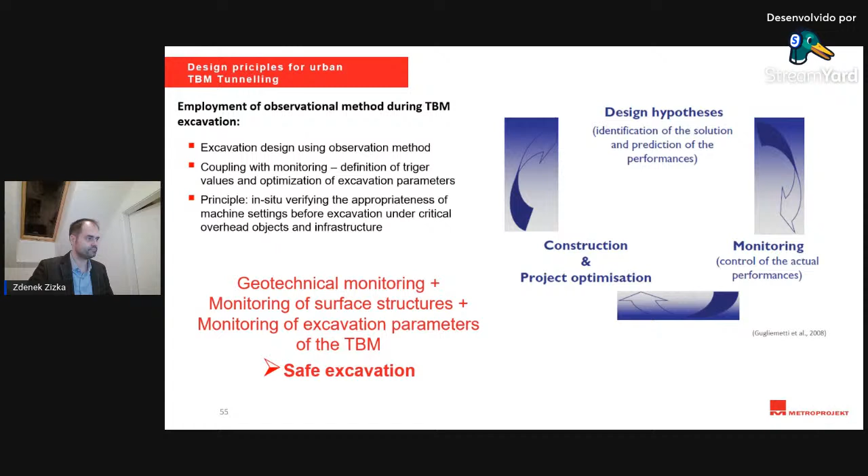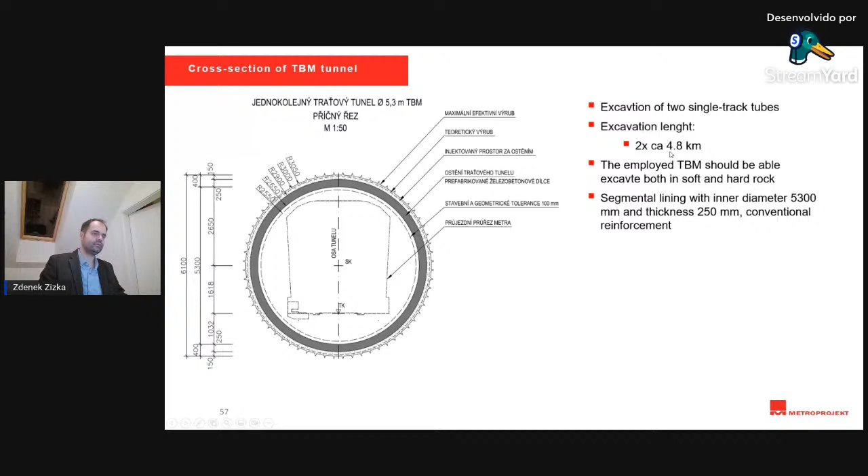The cross section: we have an excavation diameter of about 6.1 meters. The internal diameter of the lining is 5.3 meters, and the thickness of the lining is designed as 250 millimeters. The entire excavation will be about 4.8 kilometers, which is now under tender. And the TBM should be capable to excavate both in soft and hard rock and also in soil.

The cross section will also accommodate the concrete track slab for the subway, evacuation ramp on the left, cable ducts, and other constructions like service ramp and also rails.

As for the alignment, it will all start in the construction pit, and first the excavation will be done under the fields. Then we start to excavate under urbanized area, but there will be just family houses, so no high-rise buildings.

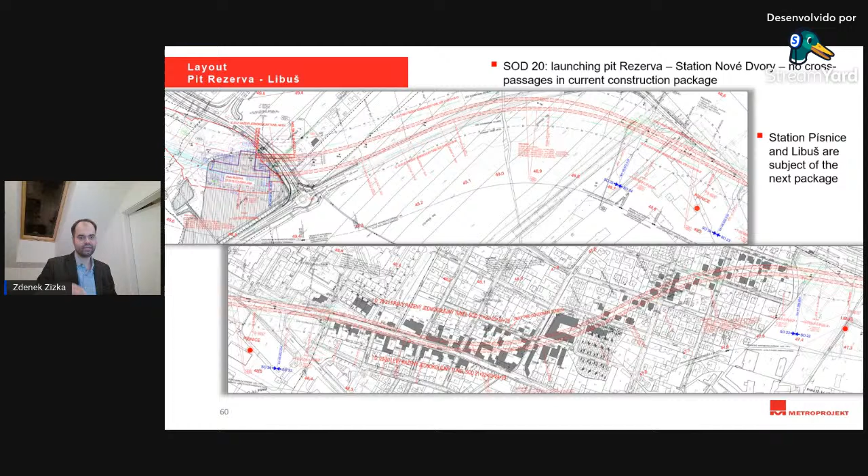What is necessary to say is that here there should be, in the next package, stations constructed as cut and cover. So it will be constructed after this TBM package. So first in this package you construct the TBM tunnels, and then you come with cut and cover methods, and you have to disassemble the segment lining and establish the cut and cover station.

This solution was not chosen by the engineers. This solution was unfortunately dictated by the fact that the town does not yet own the area for the construction of the station. So they have to discuss it with the private owners, and in order not to cause any delay of the construction, we decided to adopt this approach.

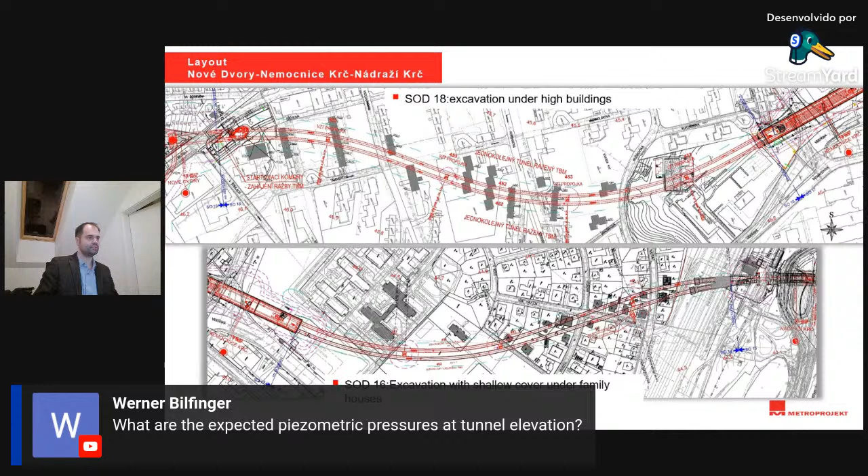So we are coming with the TBM to the station Nové Dvory. And after the station Nové Dvory, there are going to be high-rise buildings, but there will be cover of more than 20 meters in quite competent rock, so therefore the settlements could be quite low.

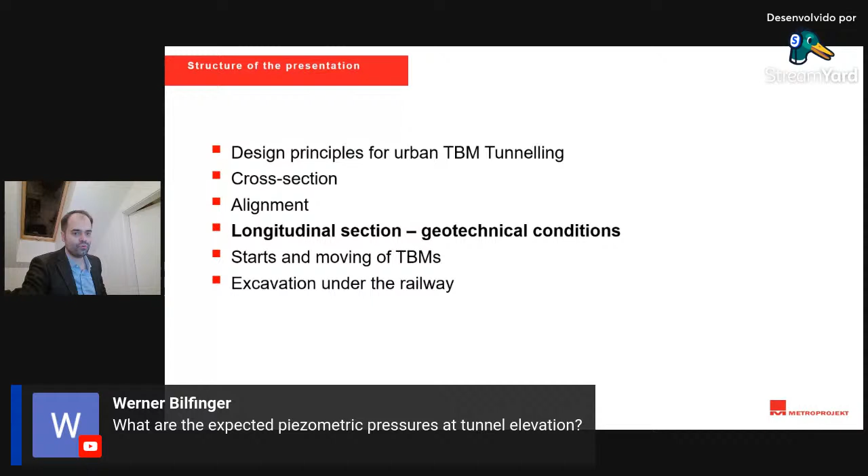So there are some other questions: what are the expected piezometric pressures at the tunnel elevation? As I said, we have in this Prague shale very different geotechnical conditions, so it's quite hard to determine the groundwater level as in the soil. So what we are counting with is up to about 2 bars of groundwater pressure, no more.

So again, the geology: you can see shale. You have here a different type of shales in Proterozoicum and in Ordovician, which is interfaced by the Závistský shift. You have abrasive layers, very abrasive layers, but you also have not abrasive layers.

And for instance, RQD is very variable. So you can have shale with RQD about 70% or 80% of the excavation through shale with RQD around zero. But on the other hand, you can have in the shale, or especially in this Proterozoicum shale, quite high UCS - for example, 50-60 megapascal.

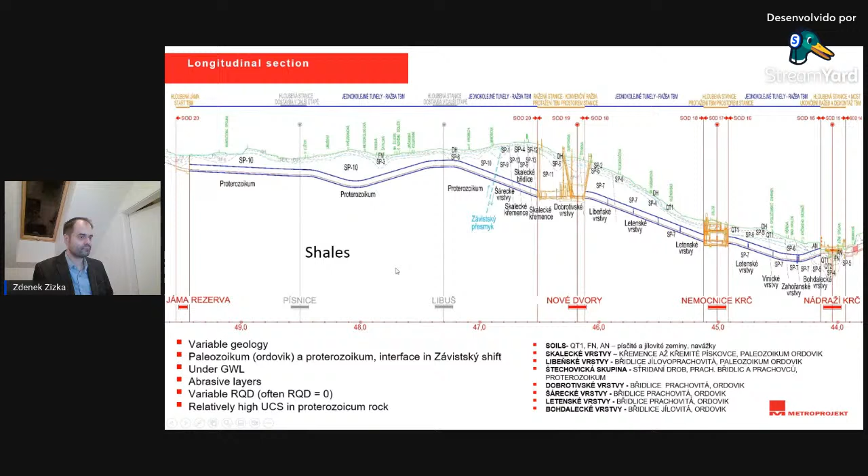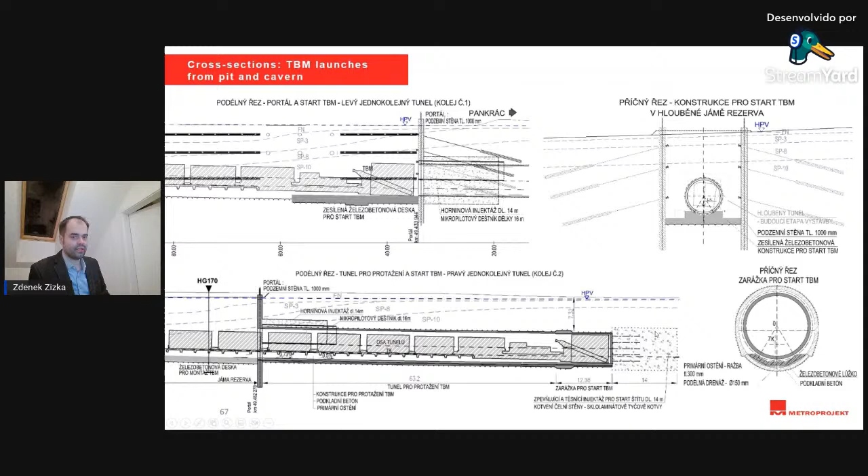Here are some cross sections for the launches of TBMs in the pit, here in the cavern, and here again also in the cavern. Before starting, the area in front of the face will be grouted to enable the start.

Through the station Nové Dvory, as there was a question, here's the designed pulling of the TBM through the station. There is a design such as a bed for pulling the TBM through the station.

So the excavation under the railway - we have here just at the end of the excavation, as the last point, we have to underpass a railway under operation. This railway under operation is about 5 meters above the TBM tunnel, and is completely located in soil. So as tough conditions as you can imagine. And another requirement is that this has to be under operation - at least 2 tracks should be operated all the time.

So we decided to establish a big grouting campaign. For this purpose, we designed 2 shafts, and here is the construction pit. We will grout this area horizontally from both sides, using soil jet grouting, and for the interface between rock and soil, some chemical grout for the rock. These shafts, before the arrival of the TBM, will be filled with poor concrete, but still in this area you can do the atmospheric intervention before the excavation of this very complicated stretch.

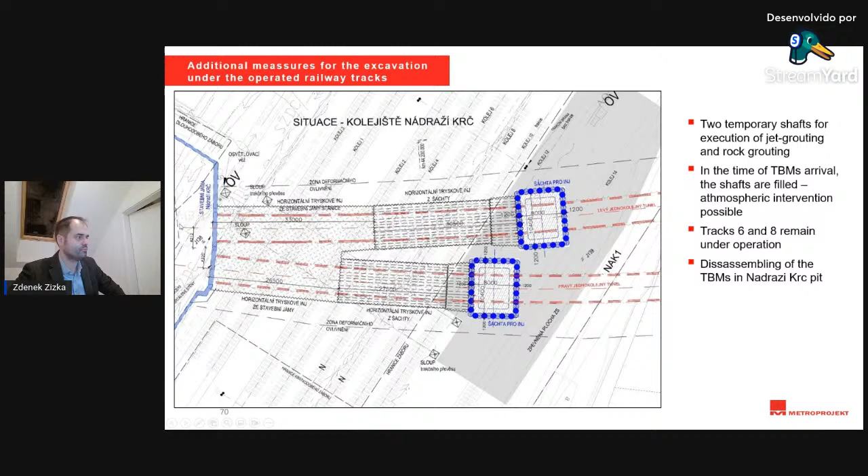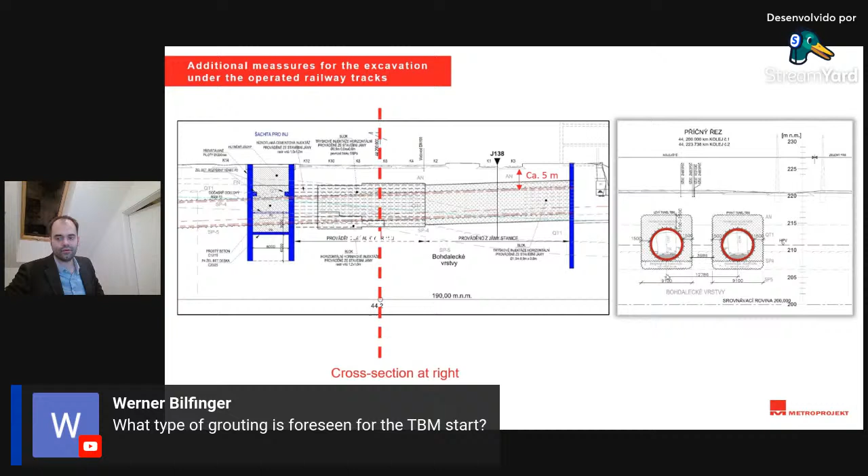Here again the grouted bodies, which are planned to be constructed before the passing of the TBM. As I said, to answer this question, what type of grouting is foreseen for the TBM start - for the TBM start we use mostly cement-based grouting.

When arriving with the TBM to the shaft, after that you will pass only through the grouted body until the end of the excavation. There are some dimensions of the grouted body, about 1.5 meters to the sides, and 2.5 meters above the tunnel ground.

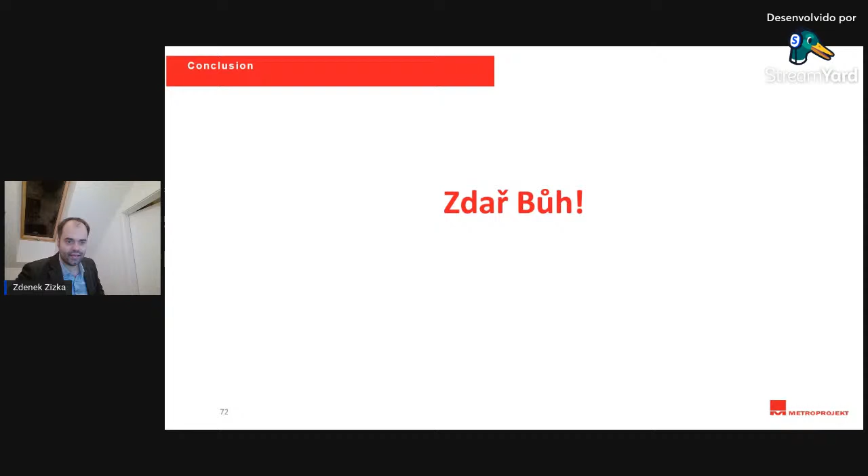So I'm at the end of the presentation. This is the Czech greeting of the miners, Zdař Bůh. I would thank you for your attention, and if there are still some questions, I'm ready to answer them.

Thank you so much, Zdeněk. I think Werner, he asked lots of questions. I do have a question.

Why did you choose an EPB? What was the criteria to choose an EPB instead of, like, mixshield? The reason for that is that we have this shale in Prague, and it has a lot of fines. When this shale, certain types of this shale, are under mechanical impact and under impact of water, they decompose into fines. But this clay, in these conditions, is much more favorable to operate with EPB than slurry, and it's also cheaper. That's another benefit.

But in these fines, are there clay minerals? Yeah, they are clay minerals. Sometimes they are clogging, sometimes not, it depends. But it's not so problematic, clogging, as you can expect on other construction sites.

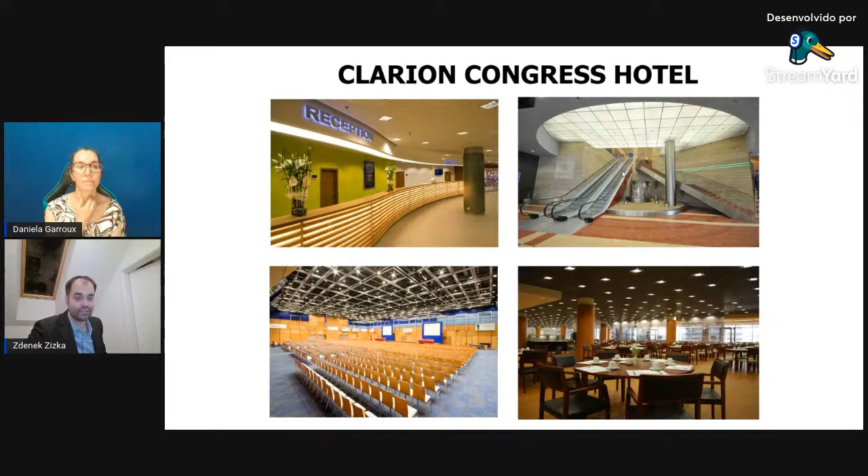I just forgot about one thing - let me share my screen. I forgot to tell about the conference which is going to be next year in Prague, in May. It's focused on underground construction, and it's always a very nice international conference in English. You are welcome to submit abstracts on the topics of mechanized or conventional tunneling - just check the website for the options.

It's a beautiful place, and it's just after Greece, so people can stay a little bit longer in Europe and go to Prague. If you like traveling, first you visit Athens for the conference in ancient Greece for two weeks, then you come to Prague, a medieval town - very nice trips. Great, so hope to see you in Greece.